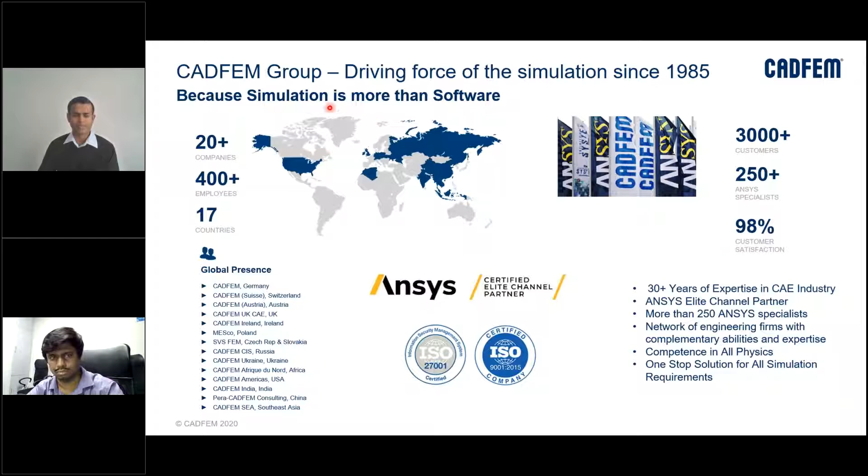All these varieties of different applications of physics you will be seeing from Santosh's presentation in the coming slides. Most importantly, we believe in our slogan, which is 'simulation is more than software,' because software alone cannot guarantee the success of simulation. So we at CADFEM Group believe in delivering, as part of our solutions, the role of system vendor and engineering know-how and education provider, all in one package. This caters exactly to our customer needs, in line with our slogan that we believe in every day of our job: simulation is more than software. That is a brief intro about CADFEM and CADFEM group companies.

Santosh, next slide. Now, before we really see the advantages of simulation, as you can see on this nicely summarized slide, where and how we see the significance of simulation in product development: basically it helps all customers in top line growth and bottom line savings. Currently, simulation is being used in the entire product lifecycle management of any product or any industry you take.

Be it in the early design or ideation phase, where engineers try to check their design ideas, or in the design phase, where you really check for a variety of different variants, for example. And in manufacturing, where people try to reduce the weight of any part, for example using topology optimization, or newer technologies like additive manufacturing. And also, not to forget, what Santosh will focus on—the current way of using simulation in live products and in operations, which we call predictive maintenance or the digital twin of any product development. So simulation is used throughout the entire product lifecycle management these days—this is what we call pervasive simulation.

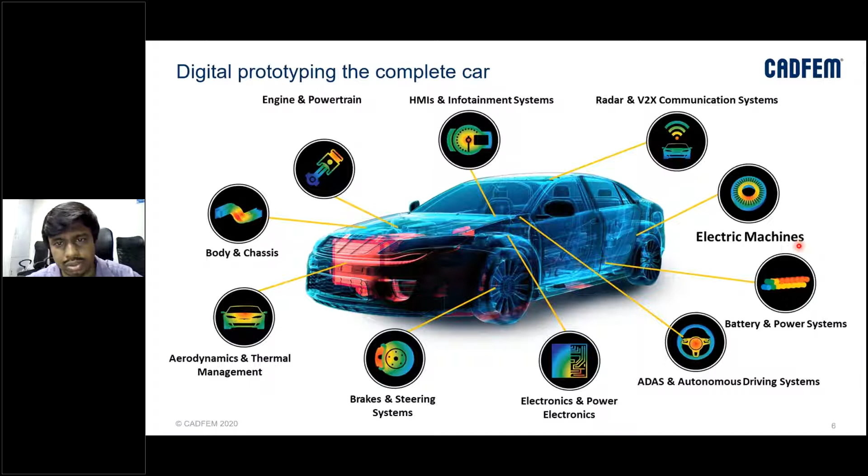While looking at these different components, we can also see that they experience different physics. It could be fluid dynamics if it comes to the streamlining of the exterior of a car. In the IC engine, another example for fluid dynamics, where fluid is, of course, a very broad definition — it could be a liquid or a gas. So if you are witnessing combustion occurring within an IC engine, it involves a lot of thermodynamics and fluid mechanics.

All these telematics, human machine interfaces, infotainment, etc., need high frequency electromagnetics. And the electric vehicle powertrain needs low frequency electromagnetics — especially I'm talking about the electric motor, which is an electromechanical device operating at lower frequencies of electromagnetics.

Vehicle durability and structural integrity — dummies which look like human bodies are being tested, which is a standard testing procedure most of you are already aware about. On the point of durability, occupant safety and crashworthiness, there are already well-framed standards allowing automotive manufacturers to design and test these automobiles on a tested track, physically live, but it's still costing them a lot of material wastage. So why don't we switch to simulations and use simulations to get things going better?

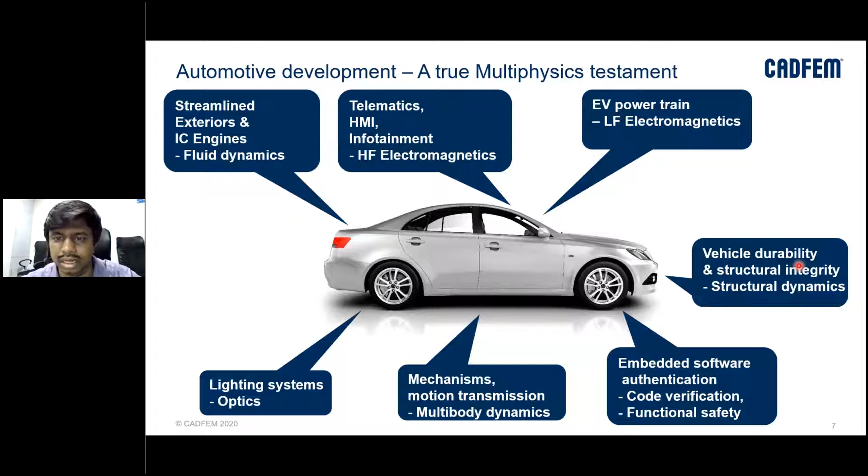It could be power steering, it could be the advanced driver assistance systems, a particular sensor which has to supply information so that automatically, in an event, the car is going to stop. If the car does not stop in such an event, it's a big problem actually. So all this is monitored and maintained by this embedded software that sits within the automobile. You have to care about that synthesis of code, how it's very neat, away from bugs, etc. So that is again coming into the play of simulations. We'll see that.

Coming to the whole theme of this presentation, the way it is organized, we have picked up the theme of organizing it with respect to different phases of the industrial revolution. So we are talking Industry 4.0 as of today, but let's go back and revisit what's Industry 1.0, 2.0, 3.0, and then what's Industry 4.0 for us.

If we revisit these things, Industry 1.0 just started with mechanization. There were steam engines at that point of time, or the kind of certain mechanisms that you are, in a funny sense, looking at here. It is a Rube Goldberg machine basically, the whole thing. So a clock rings at a particular time, a Pelton wheel rotates.

Some weights are added by a fallen cup into some bucket, and it activates a scissor, it cuts a thread, a shoe, and the shoe is actually stumbling upon a stapler, which is finally pinning up a paper. This is a kind of contraption mechanism. You could find it in any cartoons, and even some Charlie Chaplin movies, for a fact. So, mechanization is what characterized Industry 1.0.

They didn't have electrical power back then. It's all about the focus on how good a mechanism is. The mechanism in some sense is being also driven by steam engines, as I said, mostly in that case.

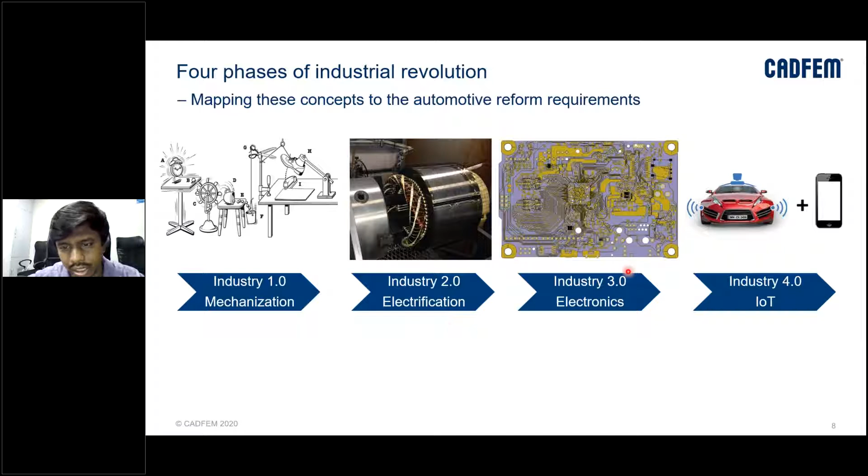Coming to Industry 3.0, it is about electronics. We had semiconductors, the diodes, the transistors, the microcontrollers that are responsible for the control of a lot of functions as of today. That is Industry 3.0 for us.

We then stepped into Industry 4.0, which is the Internet of Things. The internet is getting linked up with these sort of semiconductors, etc., to give us greater control.

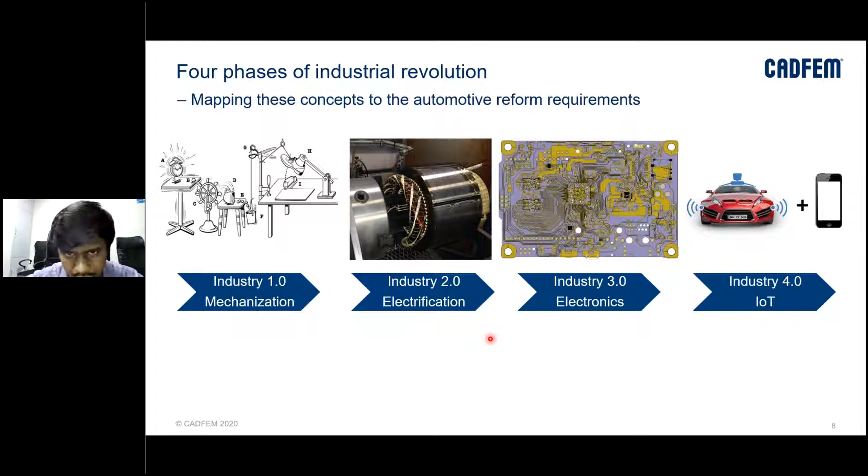So now we proceed to actually highlight what piece of technology the automobiles of today are able to absorb and operate from each segment or phase of this whole industrial revolution. Going on that way, our first topic would be multi-body dynamics for motion transmission. We are talking Industry 1.0 right now, mechanization. Our focus is, in the Industry 1.0 realm, all about mechanization or motion transmission, how good a mechanism is, what sort of force is being used to drive a particular mechanism, how many contact definitions can be embedded within a design and operation of a contact mechanism.

You see that we can actually use both flexible bodies and rigid bodies which come up in the construction of a mechanism. You will see it better in the subsequent slides.

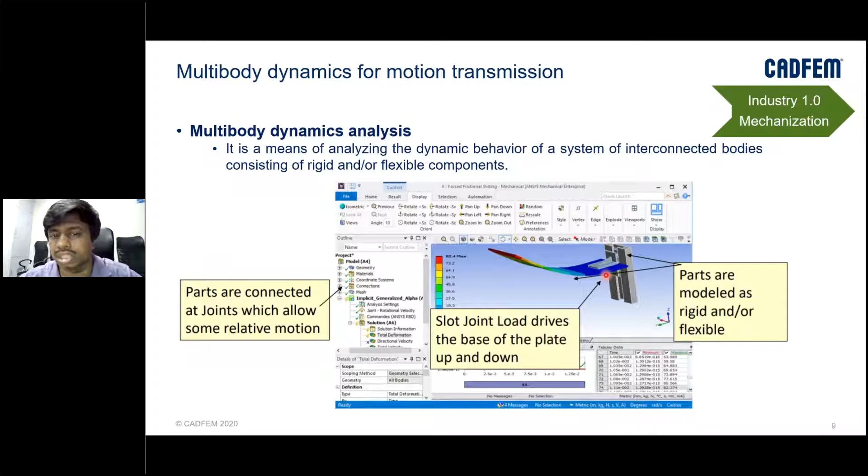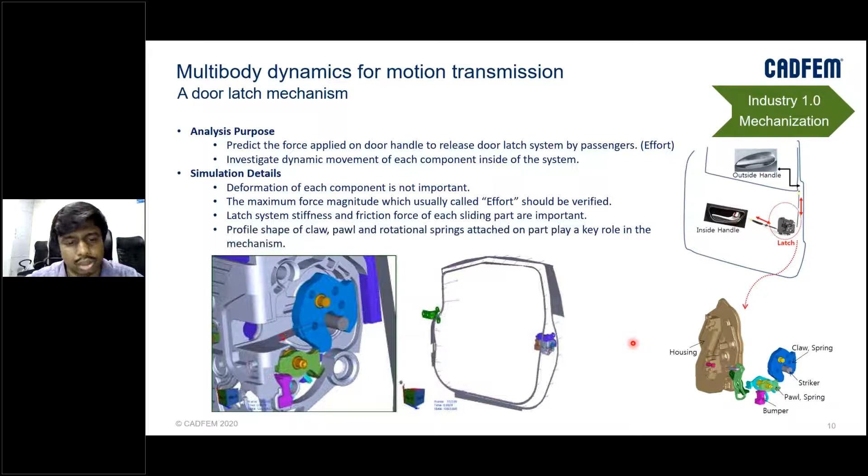We use dynamic contacts and try to see what sort of stresses appear upon these parts. We can do rigid body analysis initially to check how motion is getting transmitted. After that, you can switch over any part to a flexible body, which is now able to deform itself and show you what sort of stresses or deformations it would incur as a participant within this mechanism. So this is multi-body dynamics.

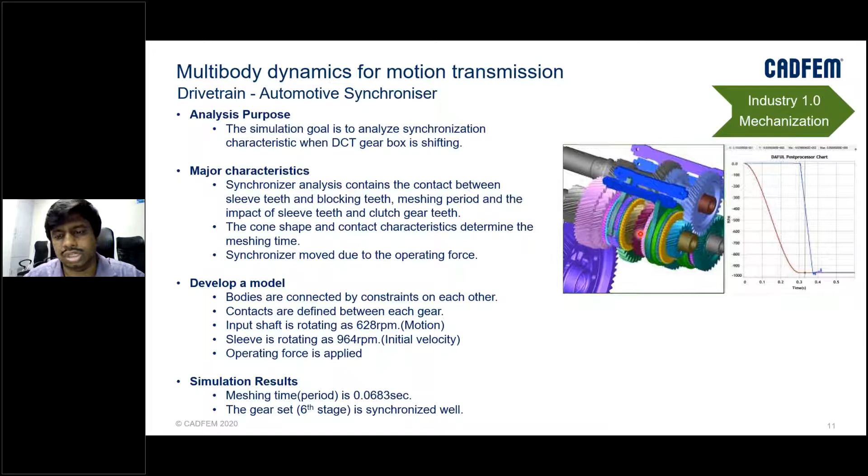All this is actually done virtually. You're not really investing into any real-time testing, for the record. And that saves a lot of cost and a lot of time as well. So prototyping cost and time taken - these are the usual benefits of simulations. A very well-valid representation of why simulation has to be used. So that's Industry 1.0 largely.

What we also see here is an IC engine's operation. An IC engine has to drive any mechanism, of course, if you're not talking about electrical power - we're not yet there. We haven't yet moved into the technology offered by Industry 2.0, which will be our next segment. But sticking to this Industry 1.0 mechanization, we have to talk about how combustion can be simulated within an IC engine.

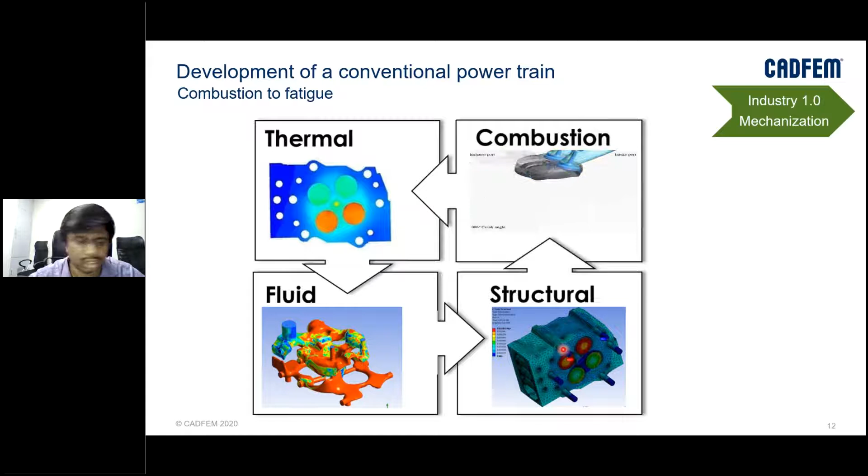Another component which is also part of any powertrain. When you hear the name powertrain, it needs to be taken in a generic sense. It should not be conceived as limiting its application only to electric vehicles. A powertrain is anything about certain parts or operational devices joined together for power transmission. That's it. So if you look at it in such a generic way, there is a powertrain as well in conventional engines, not only electric vehicles.

Conventional vehicles have an IC engine and a gear transmission system. This gear transmission system depends on lubrication, of course. So this lubricant is a fluid which is flowing and trying to ensure that the gears in the gear train do not experience serious adverse conditions of friction. If they experience them, there would be fatigue failure or catastrophic failure, much more pronounced if it is not well taken care of. So we have to assure proper supply of lubrication fluid, and then study how that fluid, along with its air entrainment, would really behave within a gear train.

So you are actually talking about a multi-phase simulation here. Lubricant is in the liquid state, fine, but there is air entrainment as well. For its functionality to resemble reality when simulating, you definitely have to take into account the air entrainment. Not only that, if it is getting heated due to friction or other heat sources coming in contact with it, such as exhaust gases leaving the engine, there is a chance that the lubricant itself can evaporate. So all these are supposed to be really cared about.

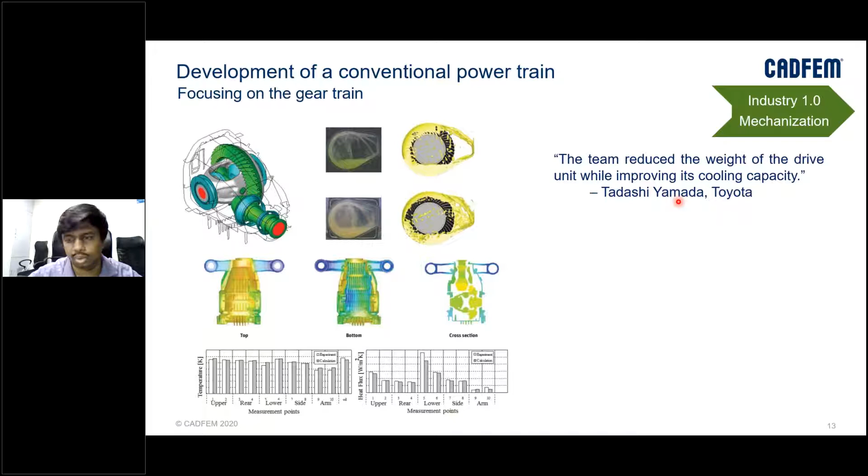In terms of fluid dynamics or structural mechanics, even topology optimization and proper design changes of geometries like this are really possible. You can find stress-intensive areas, or areas with singularities of high pressure or high velocities, or some sort of flow separation which will reduce efficiency.

Things like these are all very well possible to simulate, and simulating such scenarios is really important because it's perhaps better to test it all in a virtual sense than to subject a real prototype to all these tests, where there is a building cost of the prototype involved, and at the same time maybe not all physical conditions can be brought into play or made to influence the particular mechanism or device.

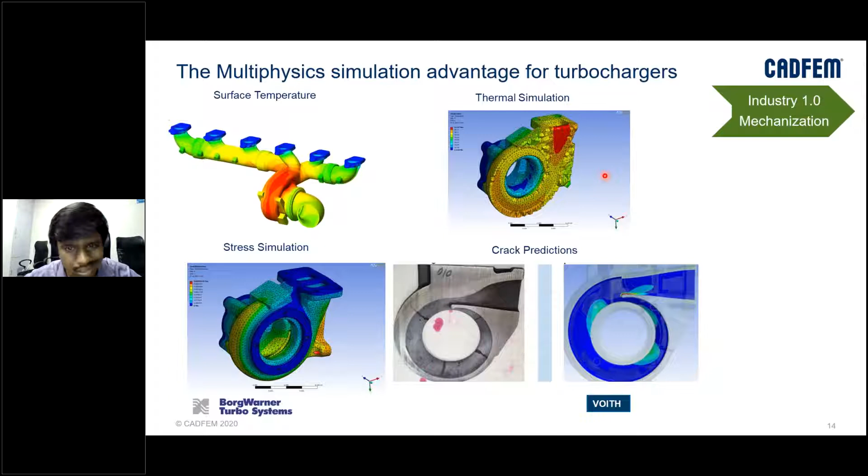While in simulations, in a virtual sense, it is possible to subject the system to any sort of questionable conditions. All these what-if questions would matter, and you can definitely derive a very good benefit in terms of appropriate answers to those what-if questions if you channel your simulations well.

Now, as we are moving into Industry 2.0, talking about electrification, I would again say that we have to have our vision and look upon the powertrain. If I talk about the powertrain components, powering the electric vehicles, it could be any type of electric vehicle, I'll come to that part later. In a simple sense, when I talk about electric vehicles, the energy storage and supply unit, that is the battery unit, is very important.

A battery in itself hosts a plethora of chemistry and a lot of multi-scale complexities, so all these are supposed to be cared for very well in simulations. We do have empirical and semi-empirically based models, and besides these there is also this particular chemistry model wherein it allows you to go to a stage where you can determine a very good appropriate sizing of the particles that make up the porous structure of the electrodes, and how much volume of electrolyte you need within the operational realm of a particular battery.

Putting this chemistry complexity aside, most of the electric vehicle manufacturers in the market today, and most of the startups as well, are basically focusing upon designing a better packaging for these batteries so that thermal management is actually assured, because they need a lot of durability working with these types of batteries. It could be active cooling or passive cooling provided with materials like phase change materials and so on, in the novelties of today. But yes, that is all taken care of well.

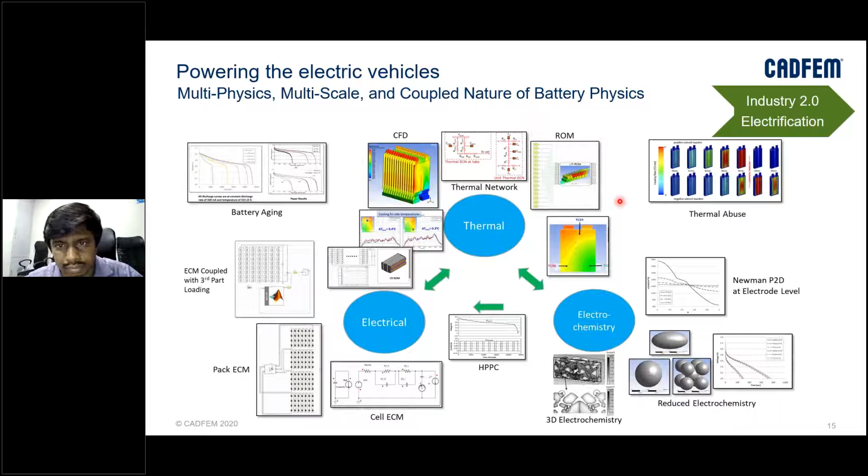You have electromagnetics. You start, for example, with the electromagnetics simulation. Let's talk about an induction motor. You provide information on the windings inside the motor and the input charge or current. Depending on whether it's DC or has an AC inverter, it would convert and finally use AC current to provide for the rotation of the shaft.

That is electromagnetics. You get RPMs or other thermal losses through the electromagnetic simulation, because once you provide these electrical parameters—imagine it's an induction motor, not a permanent magnet motor—due to the variation in the AC field, magnetism is produced, and that is how the switch of the poles happens north to south, fundamentally rotating the shaft, with all of that physics taken into place.

So how exactly are these effects accounted for in simulation? It's totally based upon the background solution of Maxwell's equations.

In another case, if you're not talking about an induction motor but a permanent magnet motor, you have to go a little further. Along with the input current, winding information, and electric properties of those windings and other materials, you may also have to provide as input the permeability and magnetism properties of the permanent magnet. That again gets you to solve the Maxwell equations in the background, and the required action is reported.

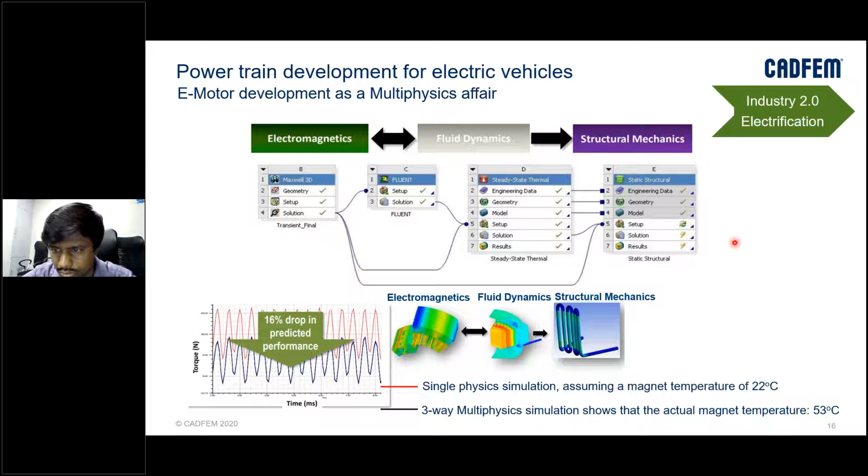Okay, so that's what this slide briefs about: a seamless interface exchanging information between different solvers in a perfectly seamless sense. There is a transfer of electromagnetic losses from the electromagnetic solver onto a fluid dynamics solver. It will transfer temperature gradients. That is one loop that you are seeing here.

There can be another loop where you can parallelly carry on with another structural solver for harmonic response analysis. Harmonic response analysis in a structural solver can transfer surface velocities, and then you can even do acoustics analysis—how is the noise getting generated by a particular motor, and can you add any other dampening materials?

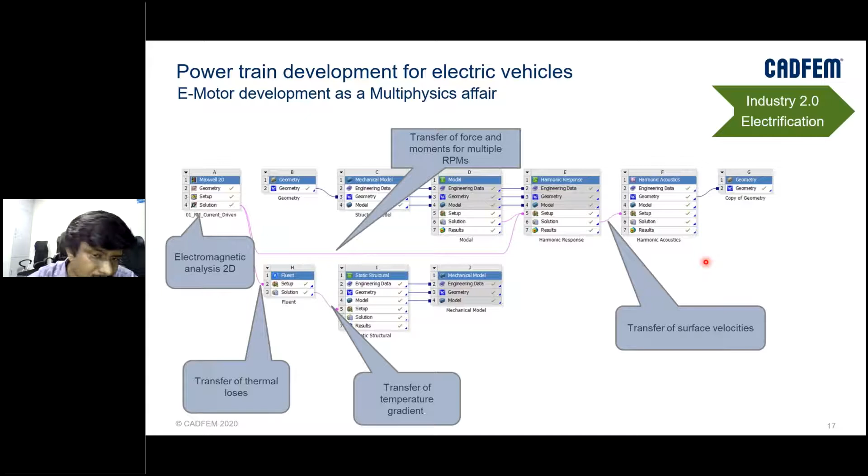If so, in what configuration and design do you have to add components to regulate the noise from the acoustics? That can be seen as well. If you look at just the heart of the electric powertrain, which is nothing but a motor, it's indeed such a multi-physics challenge to develop. And all these can be seamlessly integrated and adapted in simulations.

Coming to another topic, these hybrid electric vehicles, especially mild hybrids, come in such a configuration that the electric engine and some IC engine components have to be housed in the same environment. The IC engine generates a lot of heat, and that heat befalls upon the electronic components, which may face durability diminishing or other thermal damage.

When you travel with a vehicle like that for a long time and park it, then switch off your system completely, your active cooling is ceased. You don't have fans rotating and circulating air anymore. In that case, many companies like BASF or 3M, which are very good in material management, have resorted to developing advanced materials for passive cooling. One such example, this simulation, is done with wax material.

It is a phase changing material, and due to this phase change and the operation of latent heat, it is able to store more heat and provide a cooling effect, just like active cooling. When your engine is off and no fans rotate, you have to rely upon these techniques.

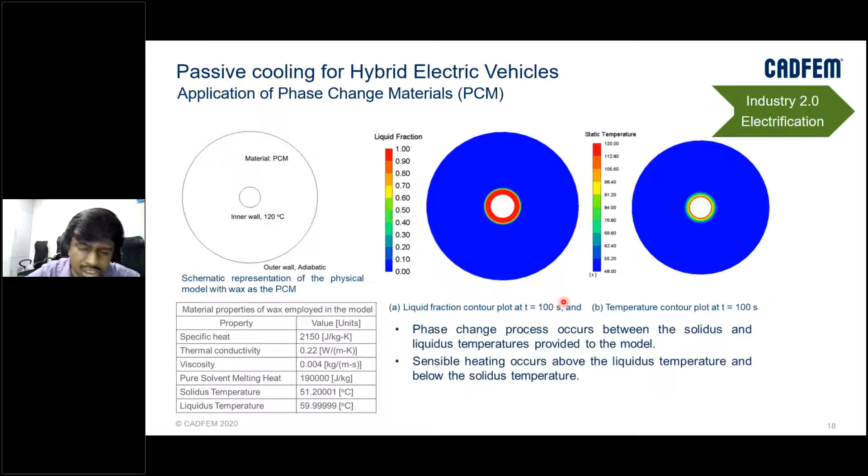When you turn a conventional IC engine vehicle into an electric vehicle, it helps the environment, reduces fuel spending, and helps you economically. But all this assembly of electric components also increases the weight of the electric vehicle. Therefore, you have to be more diligent in assessing structural integrity.

This structural integrity issue comes up when you consider crashworthiness or occupant safety. You also have unstable modes occurring on a brake disc, which can affect caliper-like components and deform them. So all these structural aspects also have to be taken care of.

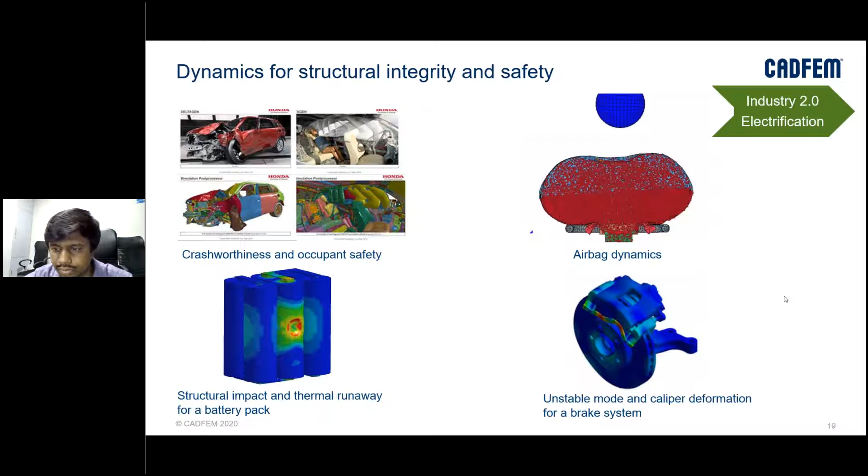Coming to aeroacoustics, this is important because an electric vehicle does not have an engine. In conventional vehicles, the engine makes noise that depresses or suppresses other noises. Now without an engine, the baseline noise is already low, but there are other places from which you get noise. Aeroacoustics focus on them becomes important - it could be just the roof or some gap within the door.

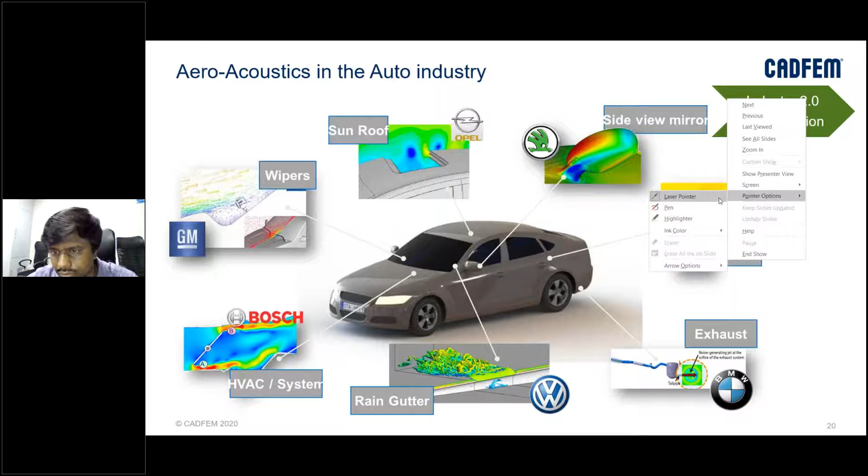So it's not only that, a lot can be simulated as well. It can be traction motor that we already saw, battery that we already saw, but electric steering, its structural dynamics, or the way it is reacting to any electromagnetic signals, power electronics, chargers, fuel cells - all these can be simulated. Maybe within the time constraint of this session we may not go in detail about all these parts, but you are pretty much in a position to simulate all of them indeed.

Electric pump, electromagnetic suspensions, actuators, sensors - all these can be very perfectly, definitely simulated. Yes, that should be not a problem.

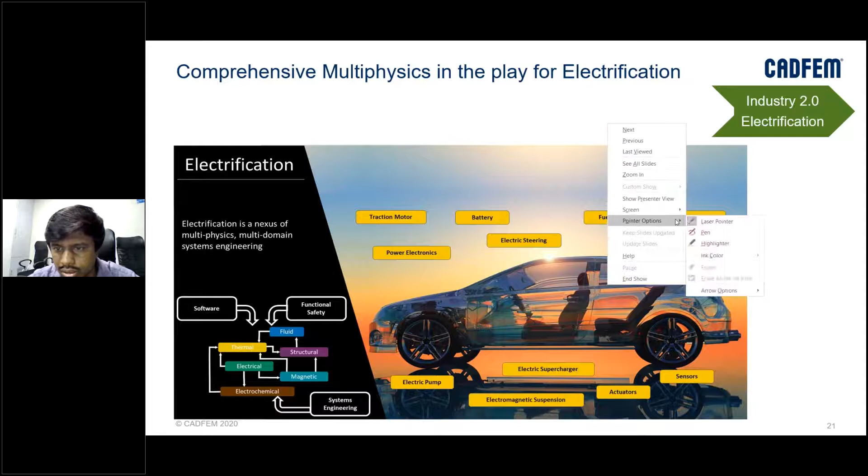Coming to the next realm of industry revolution, it is industry 3.0, electronics. You're talking about PCBs, which have got a lot of microcontrollers mounted upon them - those are the ones which get the job done actually. In the era of industry 3.0, we have to care about the thermal management and structural management or shocks of these PCBs, and that can be done.

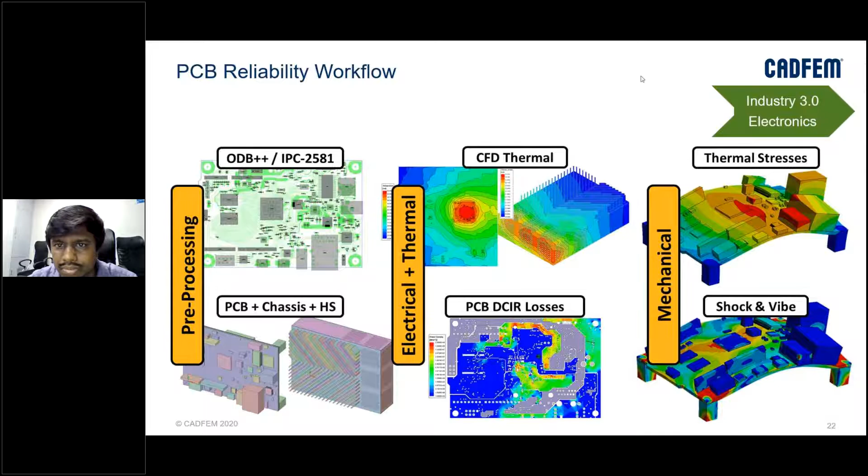I think you can correlate, as I explained, the kind of coupling that can happen between fluid dynamics and structural dynamics solvers in the case of an electric motor previously - it's the same sort of coupling coming up here as well. You can actually assess all the signal integrity issues, the jitter and other issues. Take a power map, map it onto a fluid dynamics solver, and in the case of a PCB, get a temperature as a result. Again it's kind of a two-way coupling, because resistances, conductivities, permeabilities all change as functions of temperature. So it's not a one-way coupling, it's a two-way exchange of simulation, simultaneous exchange till an equilibrium sort of thing is reached.

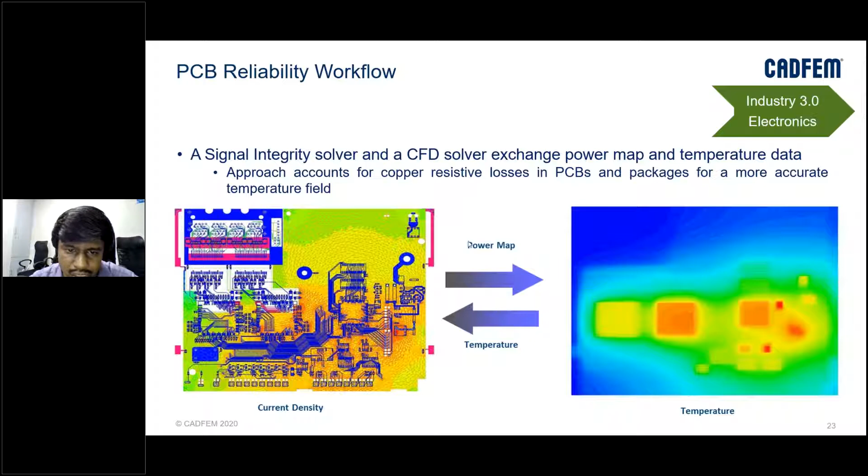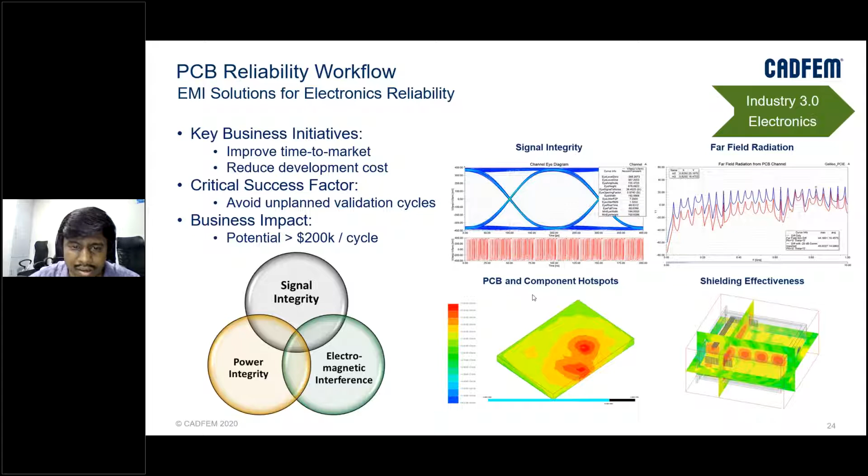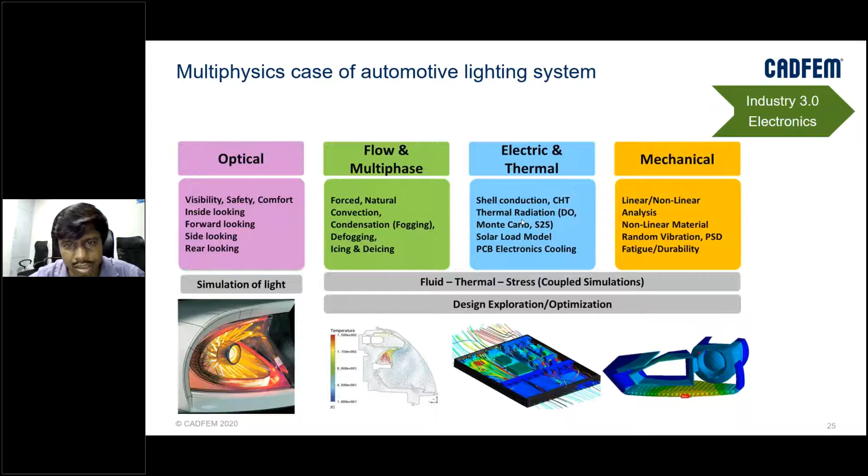You can simulate a lot of details about exterior lighting, definitely how you see the road and how the lights actually show you the way. You also have illumination upon different parts of your interiors - those can be seen as well, all with realistic transmission and scattering properties. So you will look at some component in simulation exactly the way you look at it in reality.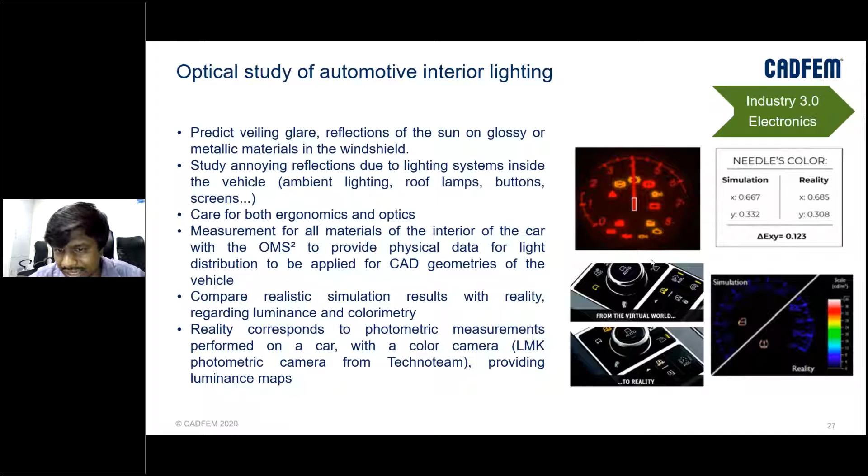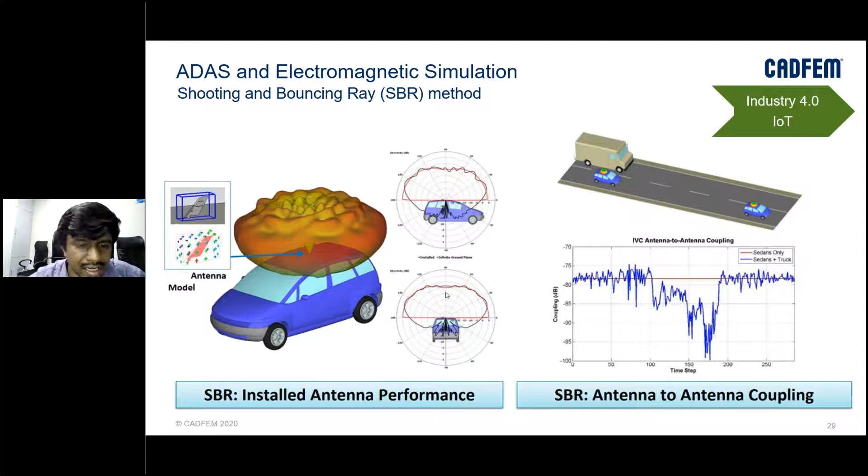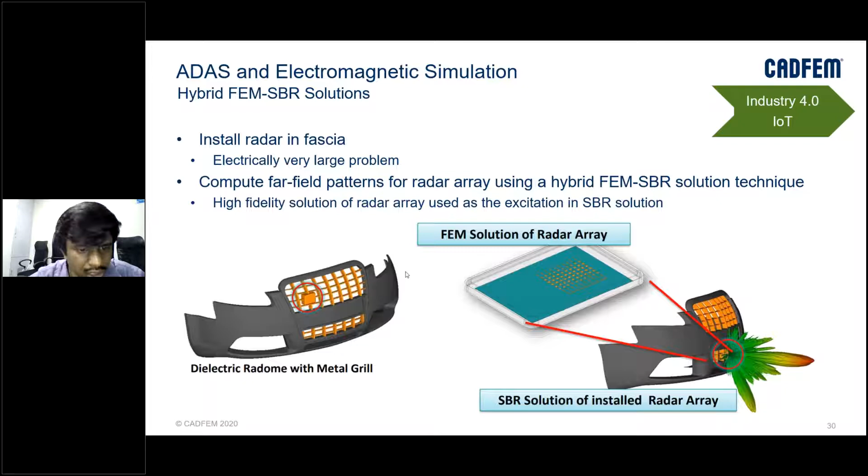You can also get into electromagnetic simulations, advanced driving assistance systems - they have antennas, and how these different antennas collide and interfere with each other, how the signals actually get transmitted, and different types of sensors. This is an array of antennas, of course, which will help you in terms of parking yourself in a proper way in the vehicle. These can be analyzed through simulations. In fact we can get all the city maps, and when you are driving a vehicle across in a city, you can really see how the signals are helping you.

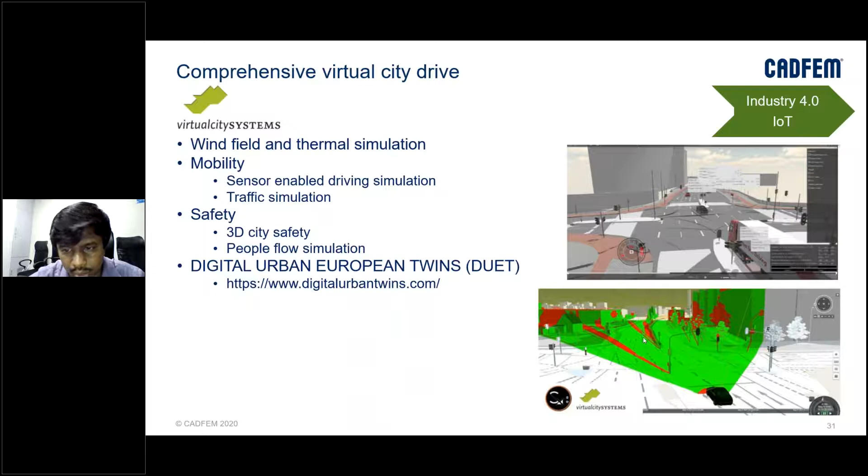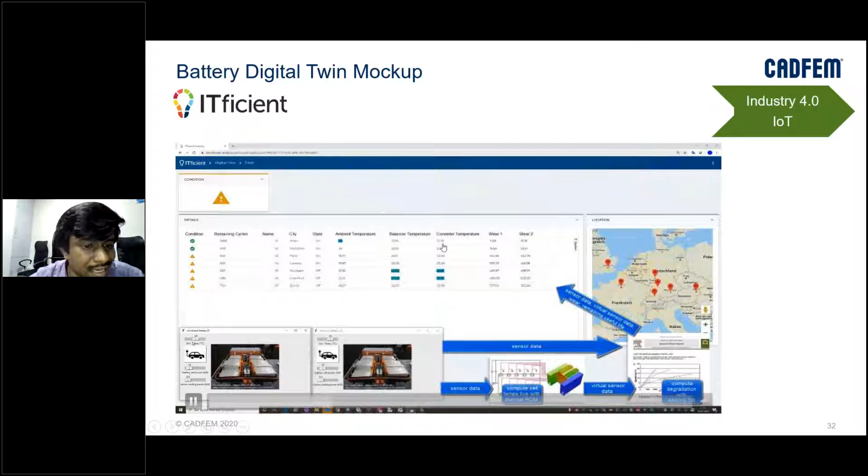As somebody is driving a car, there is a digital twin which is helping you analyze if there is anything wrong going on there. So it is a real artificial intelligence that is enabled by simulations.

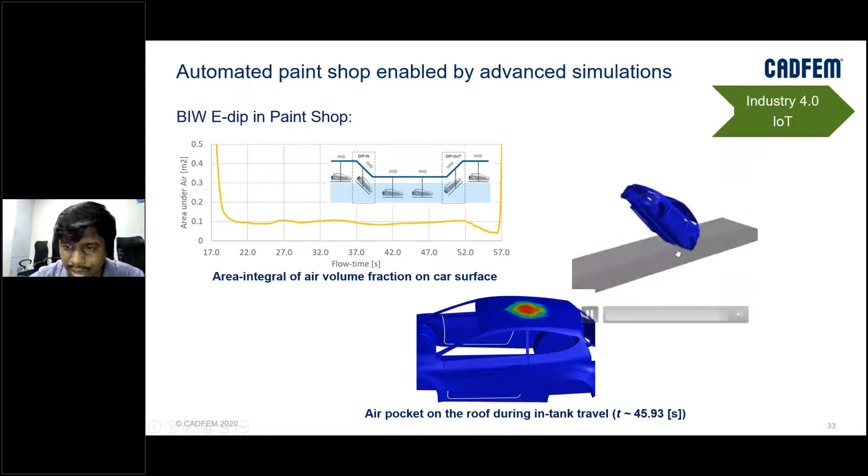This is again a paint shop which is very well automated these days. The robotics are working upon it. Sensory, multi-sensory and haptic control devices are also working upon this, but this is a multi-phase simulation again, involving a lot of bath of paint.

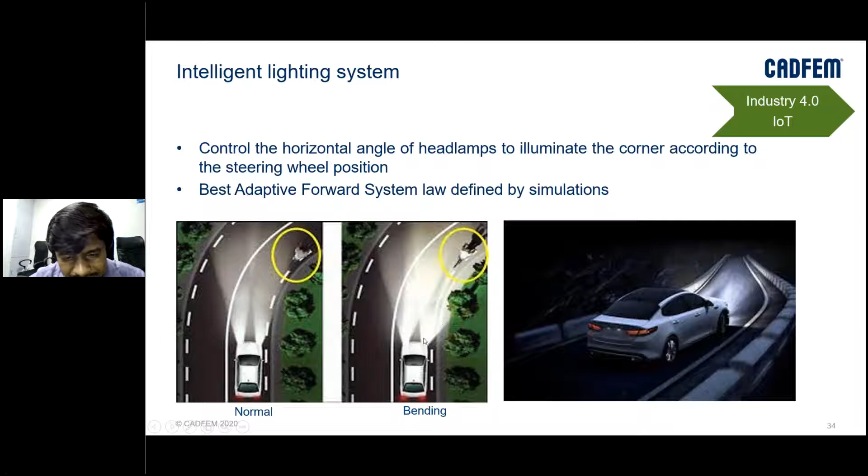And how it is getting itself distributed or deposited upon the different parts. When you are moving with a car, advanced driver assistance systems can immediately bend its lights according to a maneuver, and that is controlled by sensors, which can be simulated as well.

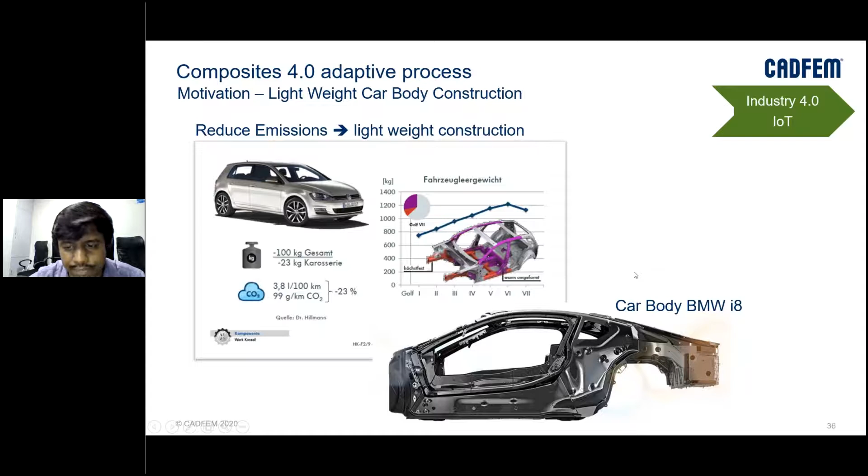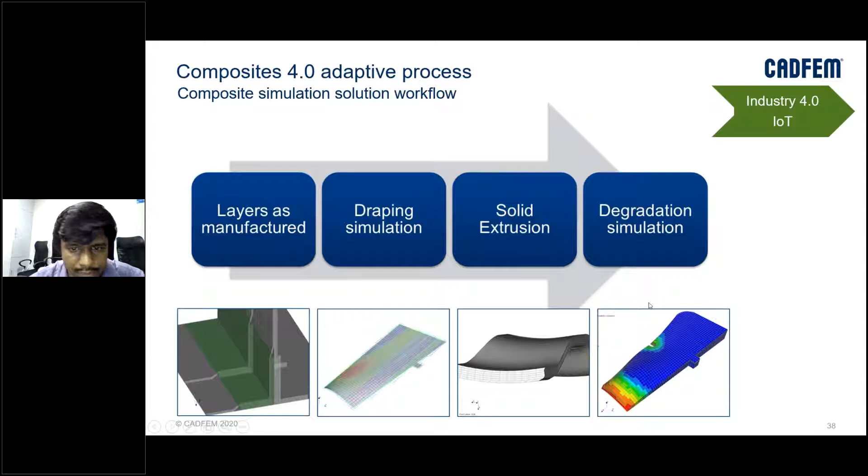Composites as well are playing a crucial role, and the whole manufacturing process of composites can be very well simulated here. Composites sum up to a lot of anisotropy, but all that anisotropy can be very well simulated in these simulations. The draping, solid extrusion, degradation simulations, everything can be very well simulated.

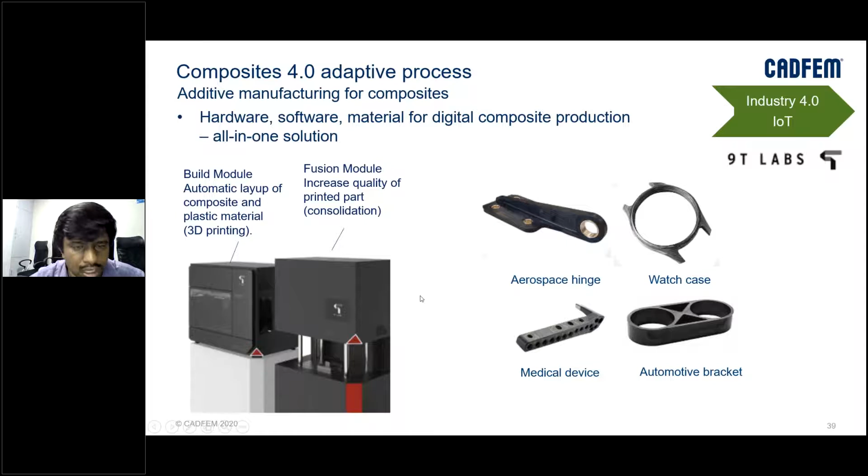This 9T Labs is a very good advanced startup as of today, using a lot of 3D printing techniques. We couldn't have imagined 3D printing in the context of composites, but yes, it is actually doing very well.

This is just about a coming up webinar that we would deliver, of course, on how graphene is very useful and how organic LEDs can help the development of automobiles.

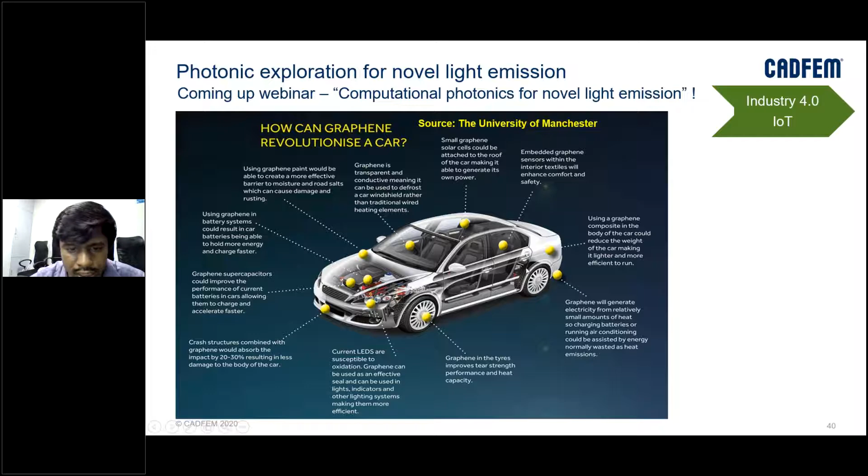Coming to the embedded code generation and certification and verification, there are intelligent tools that can reduce your job by 50% compared to the way you see it when you are using just Excel and MATLAB, etc.

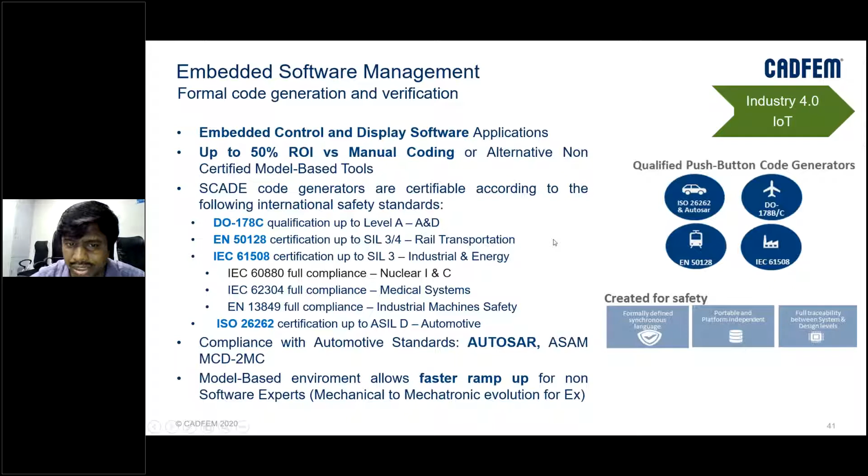You do have advanced driver assistance systems, they require functional safety, a lot of it indeed. There is this SOTIF as well, that is better required in terms of hazard analysis.

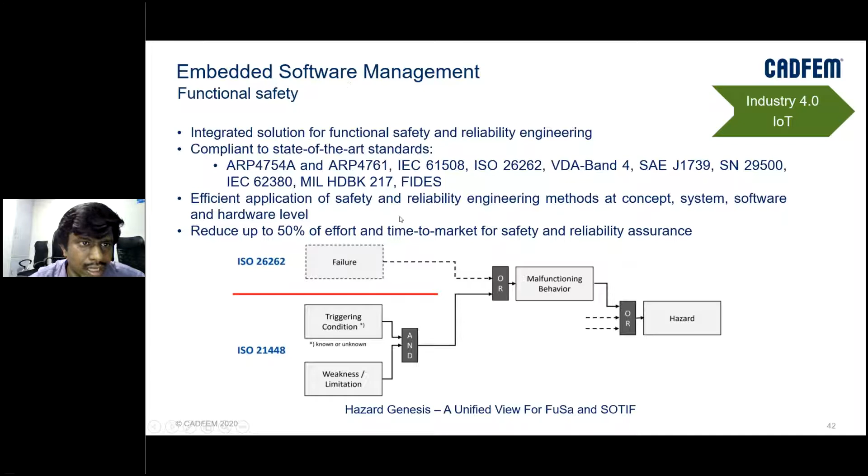This is a system simulation. Of course, it can give you quicker results, but you have to do 3D simulations sometimes first, understand, and basically find out how each component can work.

As you can see, how a vehicle dynamics module can work here, how a flywheel can operate here, how a transmission system can work. These are all 3D simulated, but the data is collected and then made up into one 1D representation, everything collected and simulated and seamlessly connected.

You will easily find out the fuel consumption evaluation. It is such a project which is done.

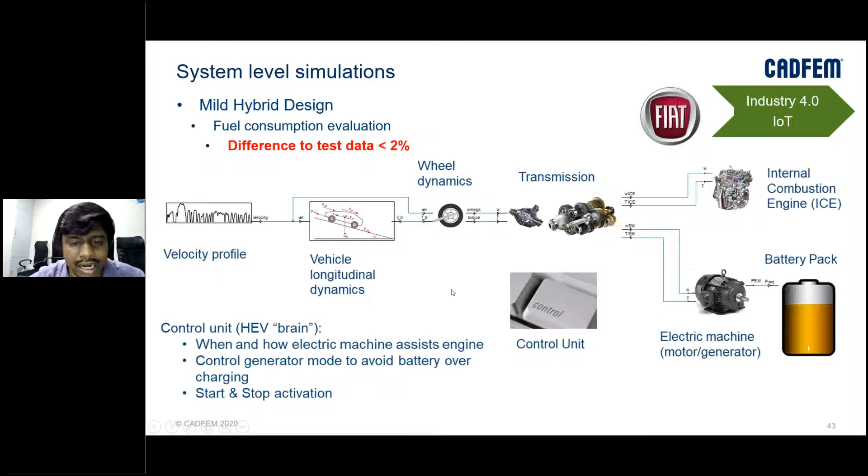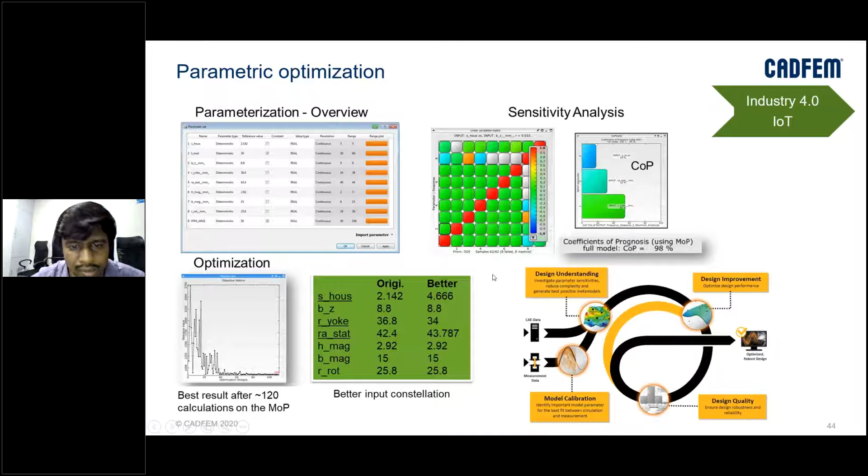Finally, we have to look at possibilities of parameterizing a system and intelligently coming to an optimized design. It could be geometry, or it could be other parameters like how much fuel has to be injected in what type of pulses in an IC engine. So all these things can be easily simulated, and you can kind of finalize a design by doing a lot of simulations that way in an automated sense.

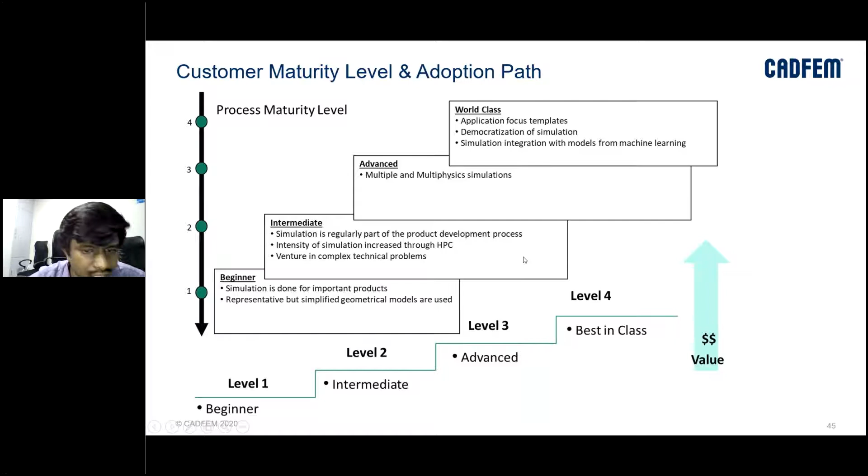There is a listed group of customers that are actually definitely using the simulations and benefiting a lot from that. I must have taken a little ahead of time, but I think we are open for questions. Thanks for being here.

Thank you very much. It was a very interesting presentation, Mr. Santosh. I think after a lot of time, at least I was able to understand, go back to my engineering days, understand the concept what you were trying to explain. It was very fundamental and very interesting. So there were a couple of questions.